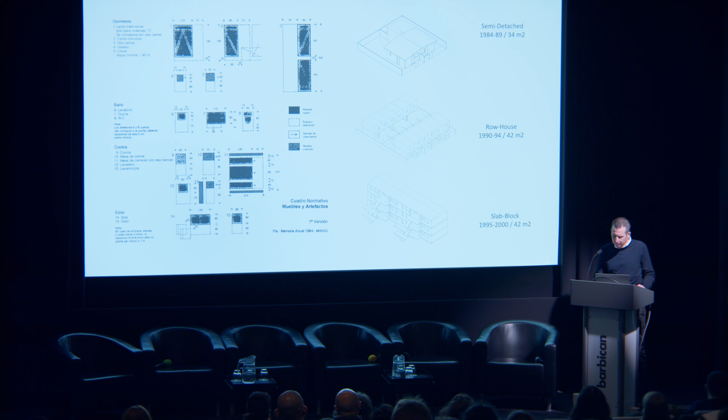Then the density started to increase, so they tried a row house typology where they could create an extra bedroom in the future, and finally a slab block typology that was actually the most proliferated one. This is a typical plan of the slab block, where you can see how this very basic furniture is fitted very tightly, without any possibility of putting it in a different way.

This kind of housing created two important problems. On the one hand, it created a massive problem of urban sprawl, creating huge neighborhoods of nothing but housing, and of course a very severe problem of segregation. On the other hand, the dwellings were really small, so people started to make use of the communal areas, appropriating public space and transforming the image of the main buildings.

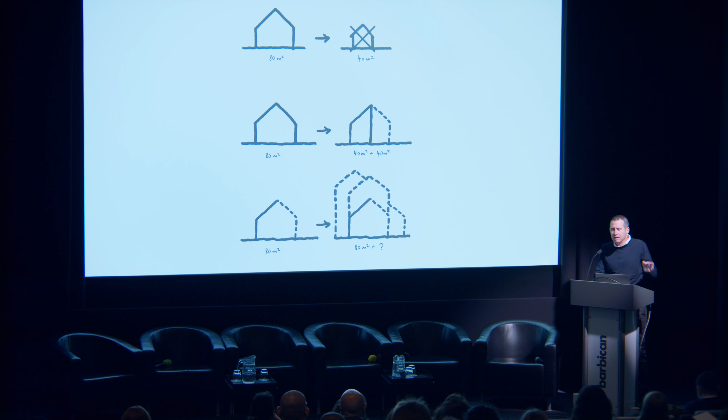This led to a second period, driven mainly at the beginning by Elemental, who advocated for creating much more generous dwellings, saying that a decent dwelling should be around 80 square meters, which was actually the DNA of the middle class. And also, to achieve that, incrementality should be considered within the standard.

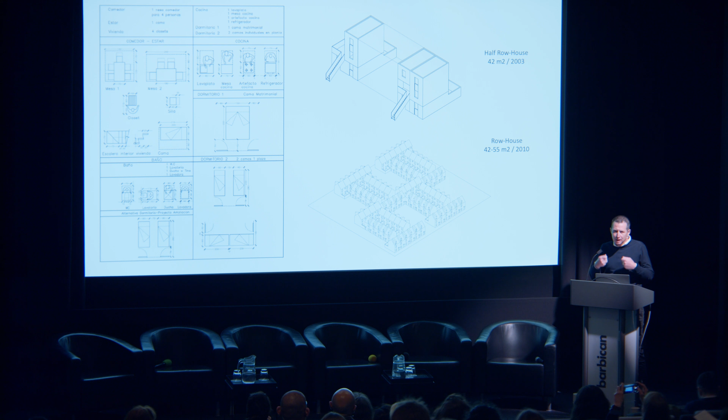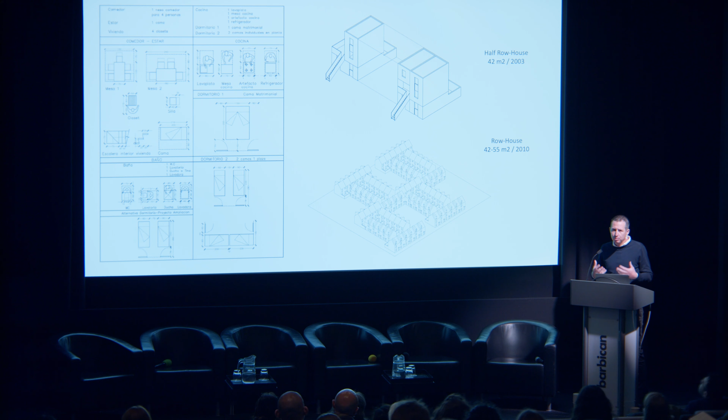So the state created this new set of standards that was not only a compendium of furniture, but, most importantly, contained the diagram of a final house—the diagram not only in terms of the image but also in the functioning of the house, how all the program comes together.

But as probably everyone knows, this just never worked. It was a good idea, but very little housing was built during that period, and the outcome was, I would say, kind of the same—as chaotic as the previous one that they were actually really criticizing.

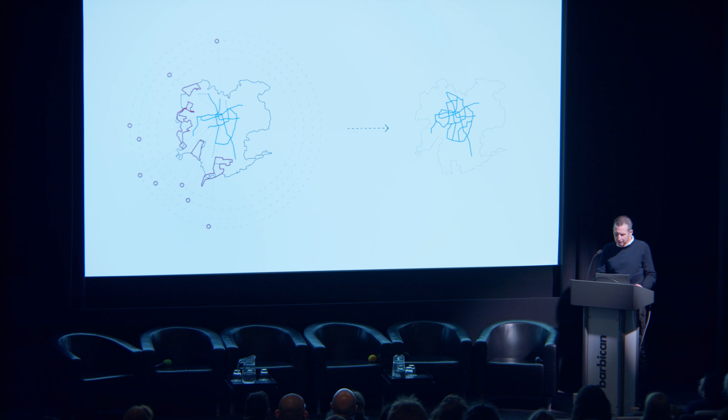So the state acknowledged this problem, and also that this kind of housing was only possible in the far periphery. They recognized the importance of doing housing in central areas of the city, and at the same time realized that the first subsidized housing built during the 80s and 90s started to collapse, and that the cost of refurbishing it was 7 times the money originally spent. So they understood they had to do things differently.

This opened the third and current period, as I would call it, which is about putting subsidized housing in central areas of the city, meaning also thinking about housing in terms of high density.

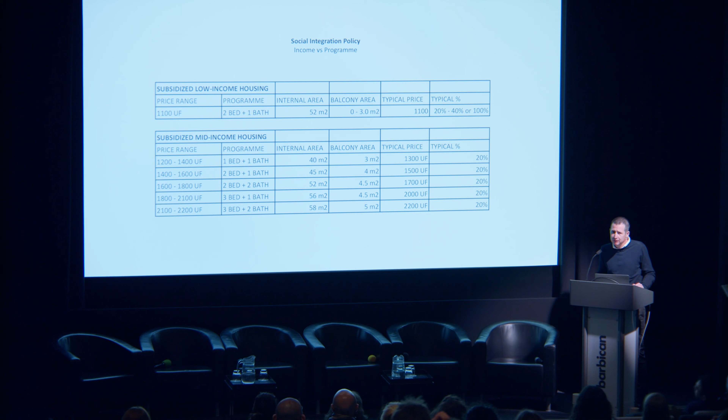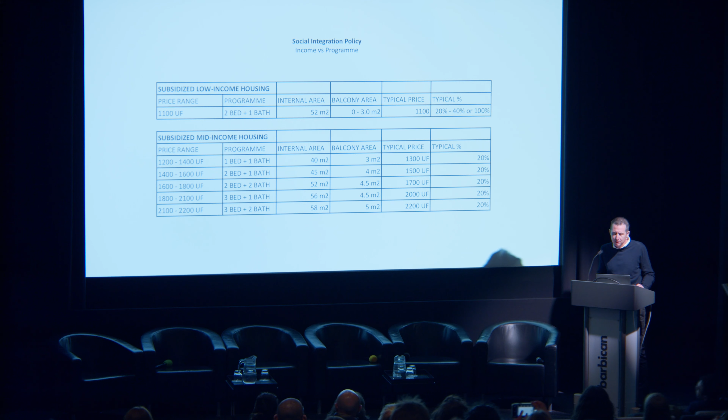The main tool to address housing provision is mainly through a social integration policy that addresses not only low-income housing, but also mid-income housing, which has been struggling for the last 10 to 15 years to access housing. This is really new. The state is not only subsidizing the most vulnerable people, but is starting to address a huge amount of people, a significant amount of the population.

This is very important to understand: the low income gets a kind of generic program. They always access a 2-bedroom, one bathroom flat of 52 square meters, and the mid-income get what they can pay. So they're not actually deciding much what kind of housing they access.

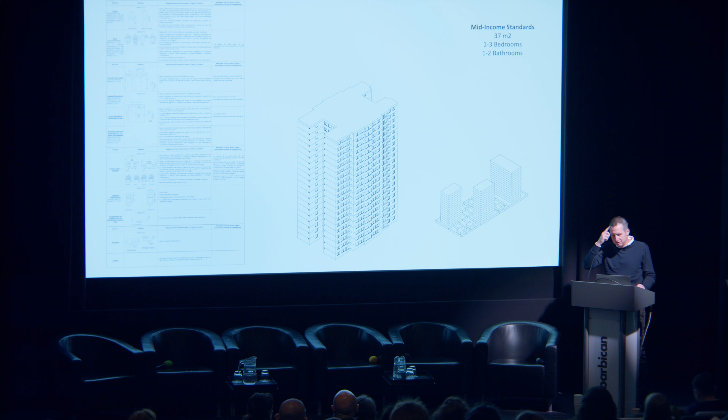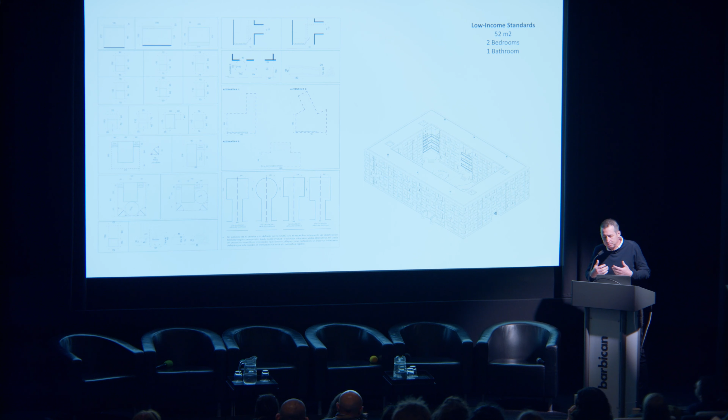To put both kinds of subsidies together, they created two different standards, one for the mid-income, in theory to be applied in high-rise, and another one for the low-income, meant to be applied in mid-rise because of maintenance problems, precisely because of the lifts. I will stop now.

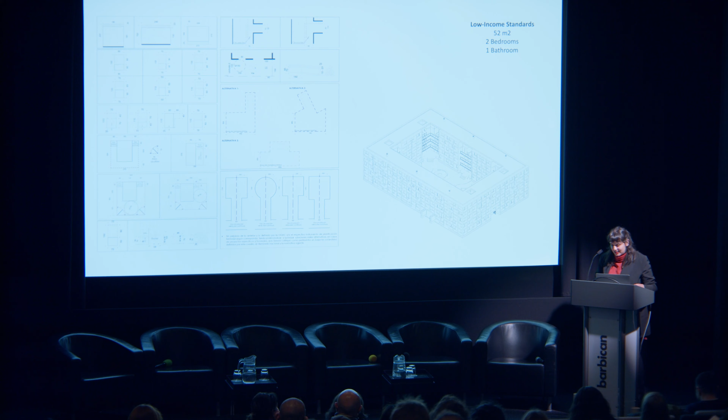Hi everyone, and thank you, Alvaro. As he said before, I'm going to talk to you about the experience of living in this kind of houses.

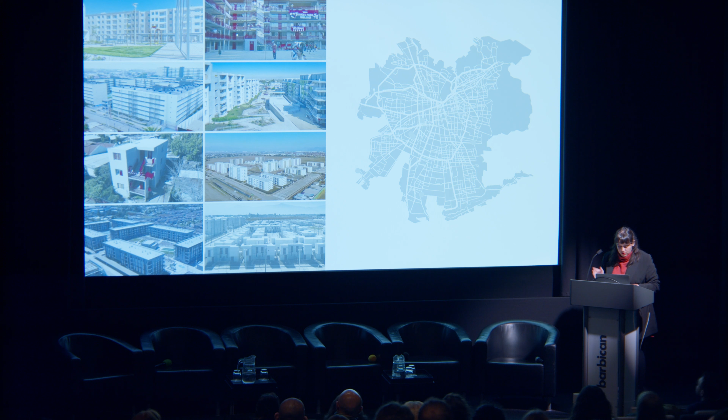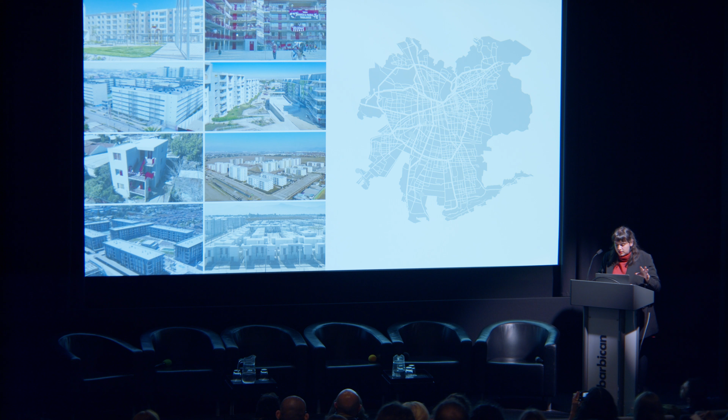So we went through 8 cases. I'm not going to go into detail about each one, but we can see that they are massive, and these 8 cases work as an example of what is being built in Chile at this moment. They were in different parts of the city.

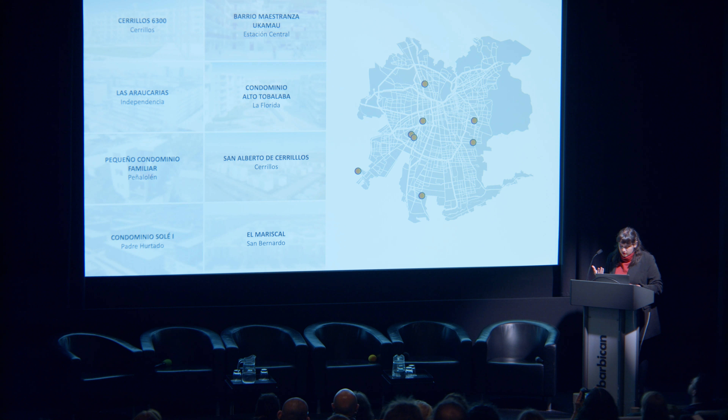So what we want to discuss is the inhabitants' perception of their own houses. These 8 cases were different types of households: couple and children, couple no children, lone parent, extended family. We asked them about several topics, but what I want to show here is that even with different household compositions, we have the same program.

We have dwellings with different numbers of rooms, but houses tend to be the same model. The logic is hierarchical: one main bedroom and one or two smaller bedrooms. Different households, of course, have different needs, but are fulfilled with the same program: 2 or 3 bedrooms and 1 or 2 bathrooms.

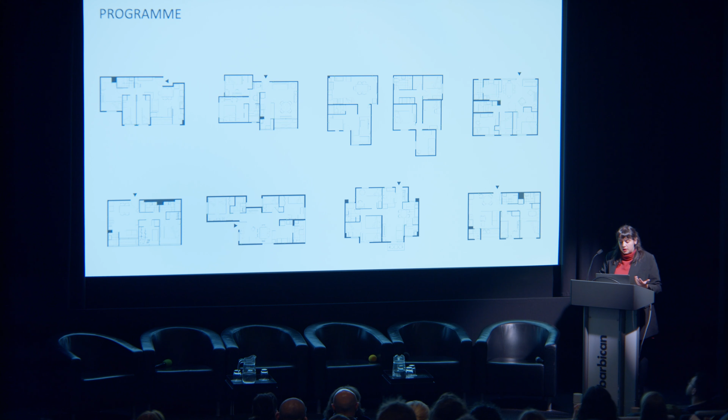So to talk about storage, people claim they don't have enough space to store things that are not clothes, especially. They don't have space, so they think they have to stack things upon each other, and they also end up using other spaces of the house to put things.

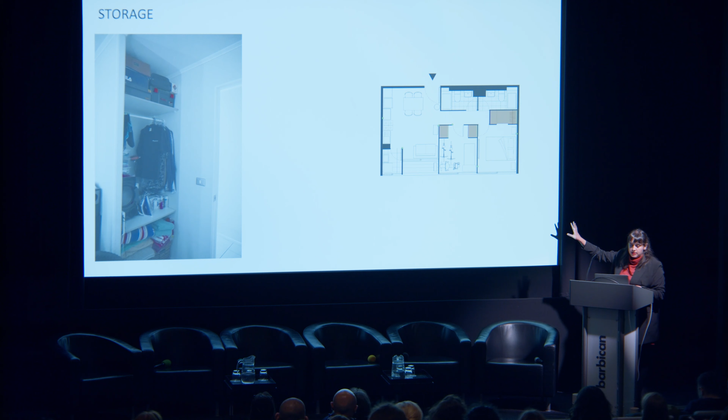For example, this is the kind of closet area that they have. This is another case. When we talk about storage, we are referring to the space to keep clothes, because this type of housing doesn't consider storage for other items like suitcases, seasonal clothing, or Christmas decorations. Those things are not in mind when we design this kind of housing models.

We can talk about two ways of seeing storage: not having the space, lack of space for keeping stuff, but also it's about using the correct furniture. Often people can't bring furniture they had before. This shows that standards not only apply to space, but also to the things we need to buy to put inside our houses.

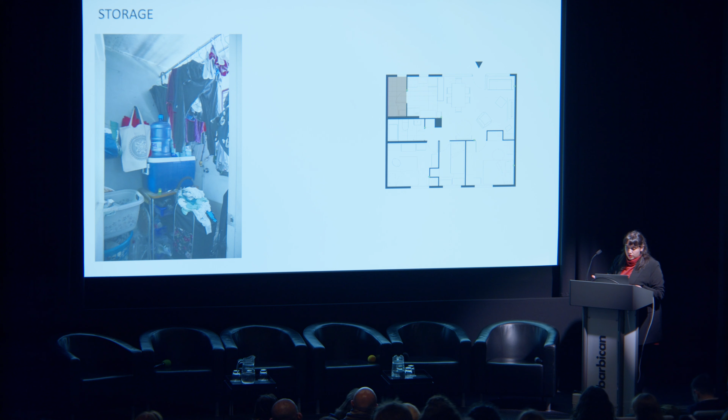For example, in this case, besides the closet area, this house has a lot of old furniture from their previous house, and it doesn't quite fit. There's also another area that ends up being like a storage space, which we call logia, or the laundry area. I think it's unique to the Chilean case—it's the space where you have your own laundry unit and sometimes your own dryer, but it's also a space where you put the gas water heating installations, because the law forbids having them inside an unventilated room or inside bathrooms.

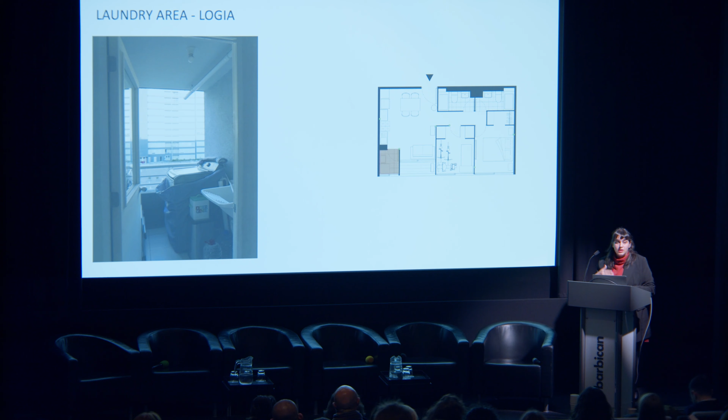So this is a space where people also have their cleaning supplies and storage, as I said before. Even though we have those spaces in Chile, people think rooms could be bigger because they had to stretch to get by. Although this space meets the standards, it's very limited and can only fit the appliance. It's not a place you could stay around.

About the kitchen, people have a preference for an open kitchen. It's something most housing projects propose, but even when they have a partition wall, people take that wall off to have open plan kitchens. A participant said she doesn't like to miss the conversations going around the house, or when she's cooking, she can hear her kids, so she prefers to be in the same space with them.

So this is the kind of kitchen that we see, and it's also in the same area as the living room and the dining area.

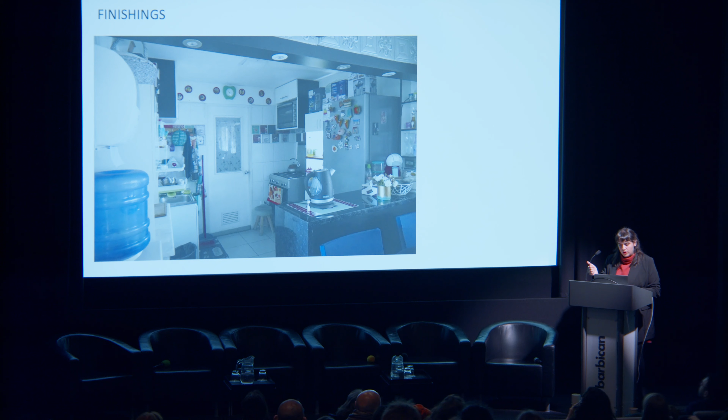This, I think, is really special to the Chilean case: some projects have not done the finishing of their houses, which is a strategic allocation of resources, because you can provide more area but you're minimizing spending on finishing. That implies the inhabitants are responsible for painting and flooring their own houses. Therefore, the houses end up looking very different from each other. I think it's relevant to consider that the level of finishing often depends on their own construction skills and how much they can spend on it.

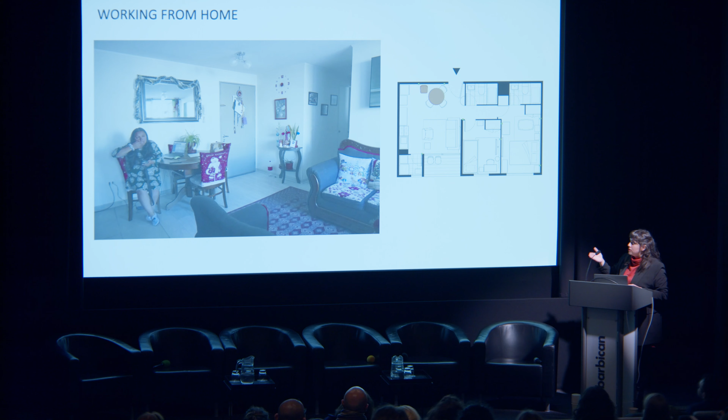This topic is pretty interesting because after the pandemic, we think working from home looks like this: working remotely, having a laptop, a chair, a table, and an electric outlet, like in this house. She claimed she doesn't have enough space because she's using the dining area. She doesn't have a room for it.

But working from home also looks like this. This participant had a pet grooming table, a foldable table she used in the living room, but she also had a hairdressing salon in the corridor of their house, looking up to their rooms.

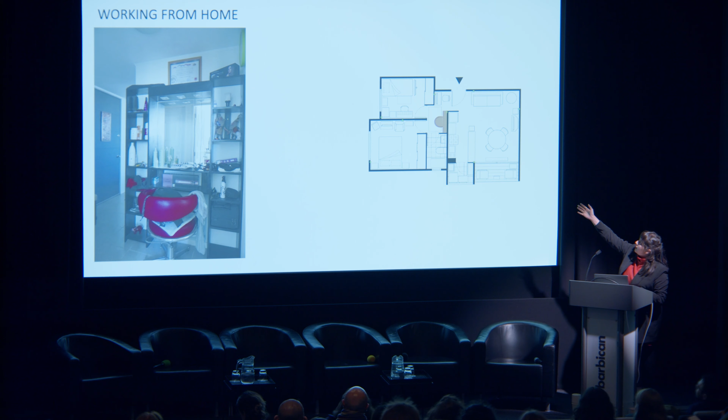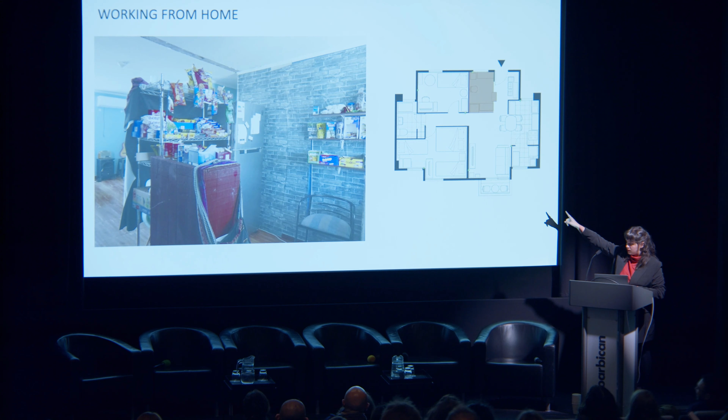Working from home also looks like this. This participant had a little shop inside her house, and as you can see, they had to take off the partition wall because that was a room. She sells goods inside the housing complex, and they took the partition wall off but used an existing window of the bedroom to run the shop without having to open the main door.

So I think it's very interesting to see how working from home means different things, and we must take into account that it's not only a laptop kind of work.

There's another thing that I think is really special for the Chilean case: how they think about safety. We asked them, what makes you feel safe? A participant said the quality of the building, meaning living in an anti-seismic building with good thermal and acoustic insulation, but also protections against external threats, that no one can enter your building, that kids can play in the enclosed area, having a concierge, cameras, intercom, knowing who's coming to your place before they knock on your door.

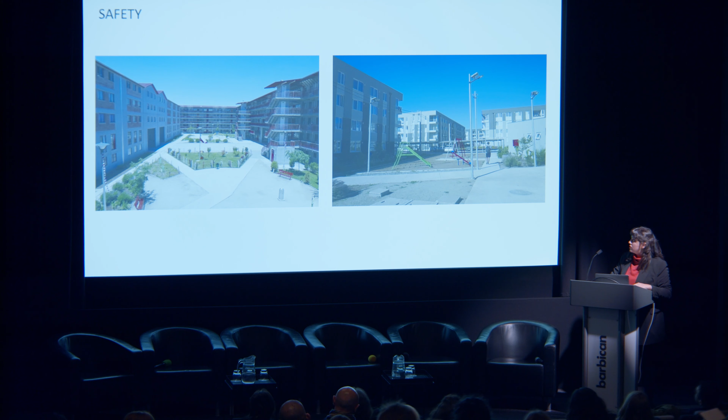For me, the most important thing about safety is that safety means ownership. It's part of the imaginary of the dream of home ownership, or as we call it, el sueño de la casa propia. It also explains the lack of regulation in terms of rental models, because people expect and desire to have their own houses, since renting is not only expensive but also carries the risk of being kicked out.

So now Alvaro can show us how practice answers these questions.

I just want to share very briefly some of my attempts to address some of the problems of housing standards in Santiago.

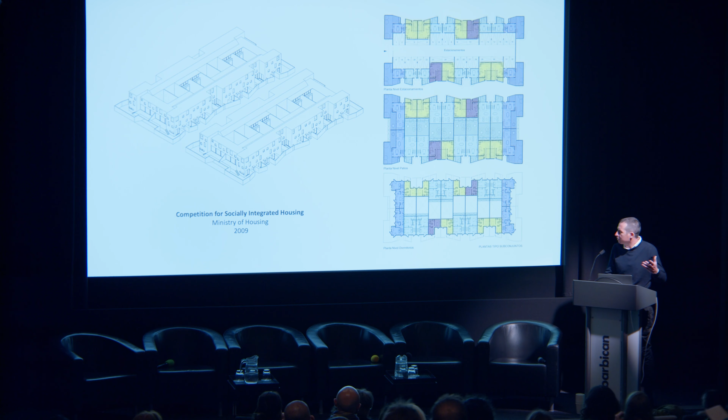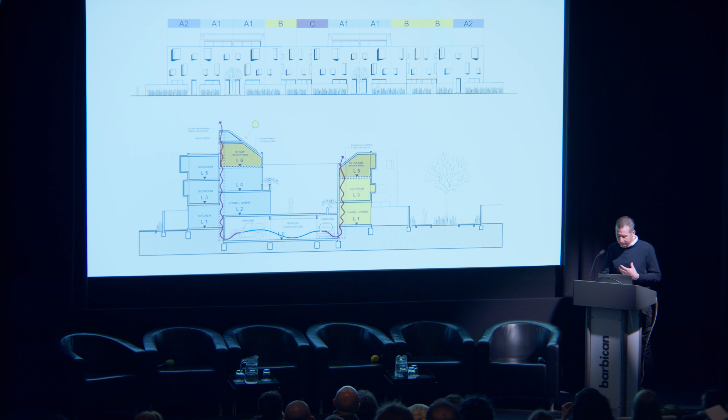Well, this is a project that is kind of very old. It was the first competition by the Ministry of Housing when they were just starting to think about the idea of social integration. So I did this kind of row house that could absorb the large amount of typologies that are typically considered when you design for the integrated schemes, mainly through a corridor and this section that talks about the complexity that happens inside, but in fact the facade is really neutral, producing a more homogeneous and more integrated architectural framework, let's say.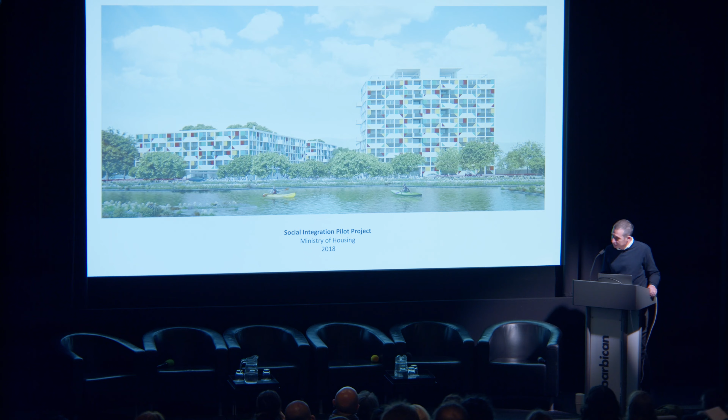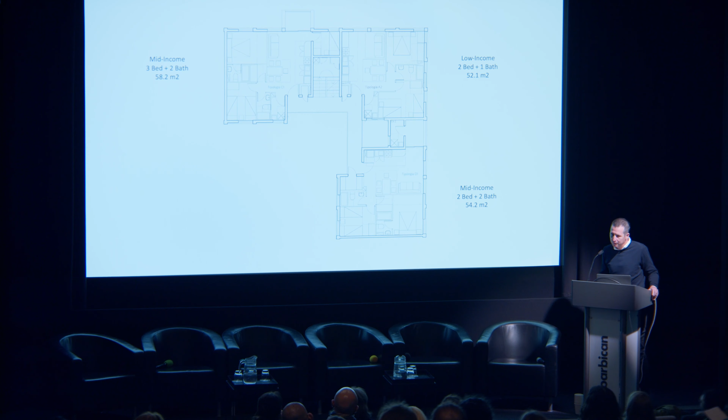Almost 10 years later, I participated in the first attempt of the Ministry of Housing to build their own housing scheme. They didn't build it at the end because of political problems, but it was kind of the same, now in mid-rise, and the same kind of approach: how to address, through one or a more articulated formal approach, putting all this diversity of dwelling types together, and how to create communities.

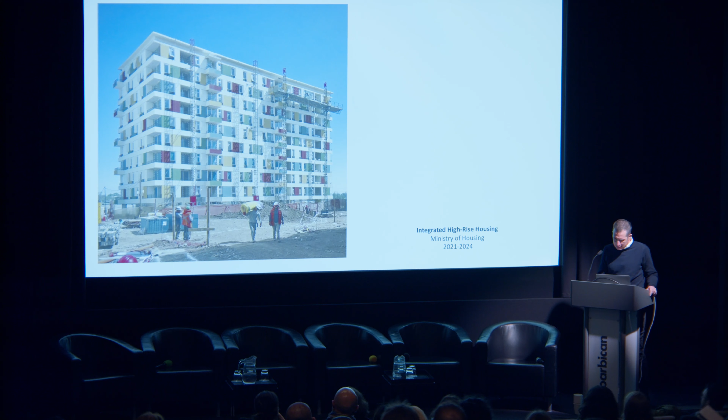And this is another project that I'm about to finish in June, and this is really talking about, I would say, the current state of what the ministry is aiming to achieve right now. In terms of they are not pushing much in terms of flats or dwelling design, but they are trying to include other kinds of standards in terms of design of public space.

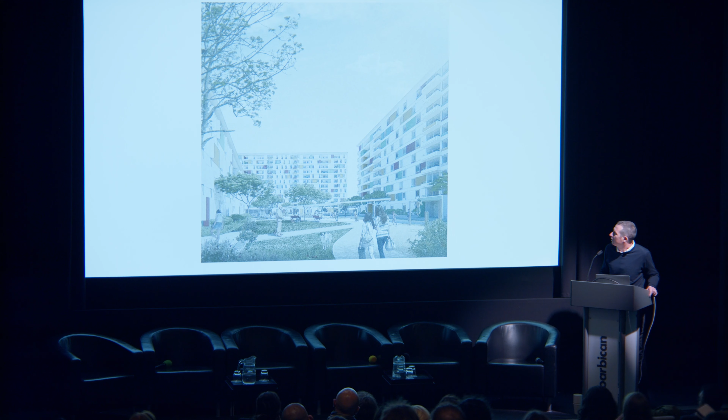How do you address the problem of parking? The project has 70% underground parking. For example, commercial areas, urban space, the entrance, the interior spaces, with specific areas for the different ages.

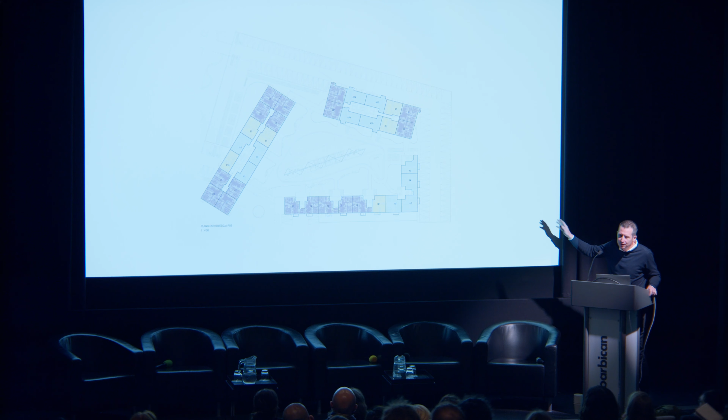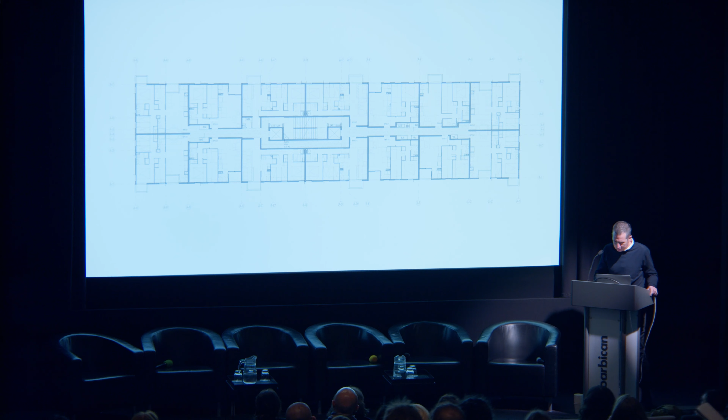Well, you can see how it's getting there. And also, as I was saying, this diversity, I mean, this actually looks kind of simple, but there are, I think, like 15 or 16 typologies, precisely because it's extremely over-specific, the application of standards, and that, I would say, overcomplicates the whole thing. Well, and how this neutrality kind of absorbs that problem.

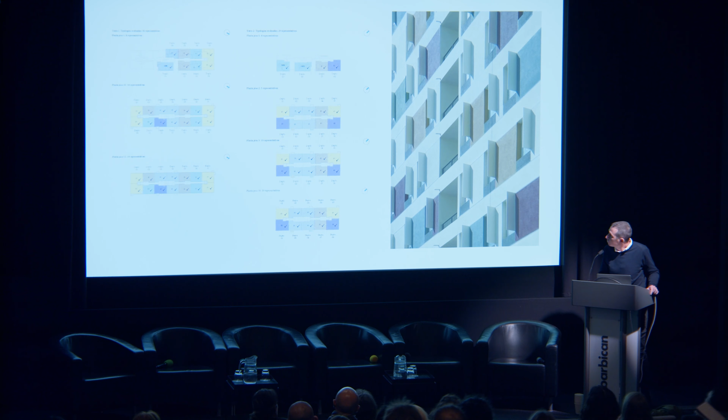Another aspect they're really trying to achieve from the ministry is energetic certification, and for example, all these vertical elements for solar control. They are really trying to have more versatile facades and the use of balconies.

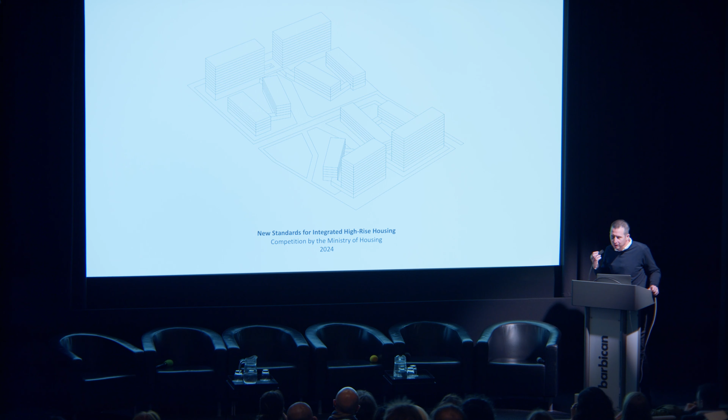And just to finish, I would like to share this competition that I stepped out of, but I think it's really important at the end of my practice, trying to break the approach to the design of dwelling units at the scale of the unit, and some very specific part of the Ministry of Housing.

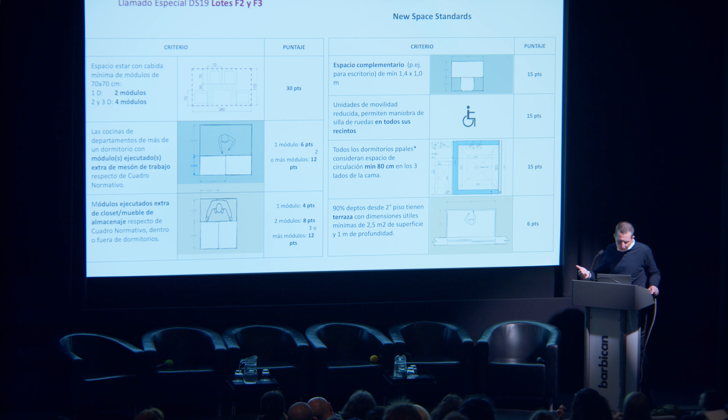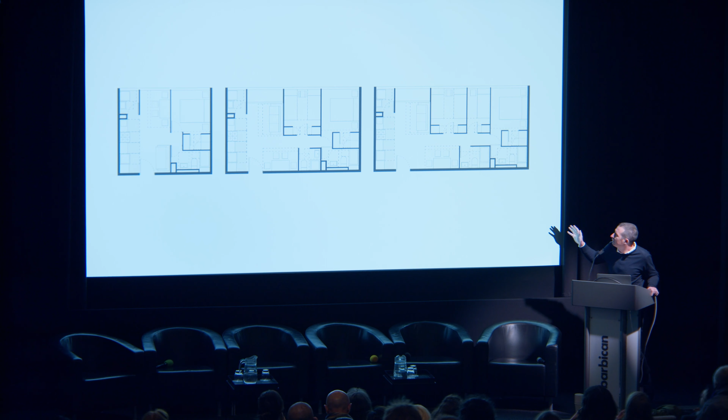They're trying to push for better standards. They're asking for larger space for the dining area, larger space for, I don't know, larger bedrooms, and so on. So instead of addressing the dwelling design in a differentiated manner, the relationship between, for example, this approach and the house is kind of the same.

So I thought, okay, but what if I try to do the opposite, how to try to create the most neutral and perhaps the most successful dwelling solution that you can find in the private market, which is what we call the butterfly plan.

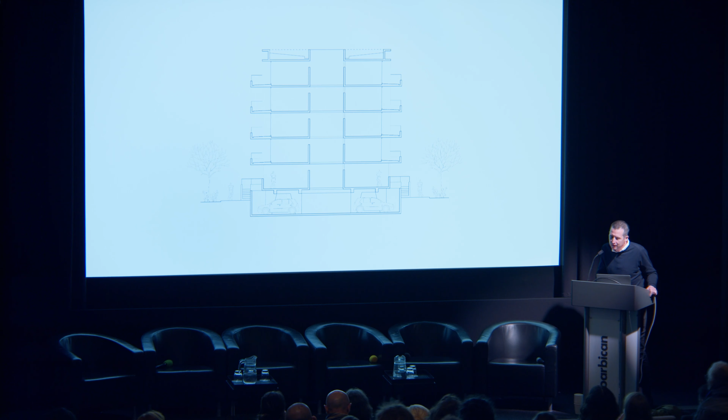So I developed this kind of slab block with the underground or half-sunken underground parking, which has very reduced costs, to half of it, and it's a significant part of the problem.

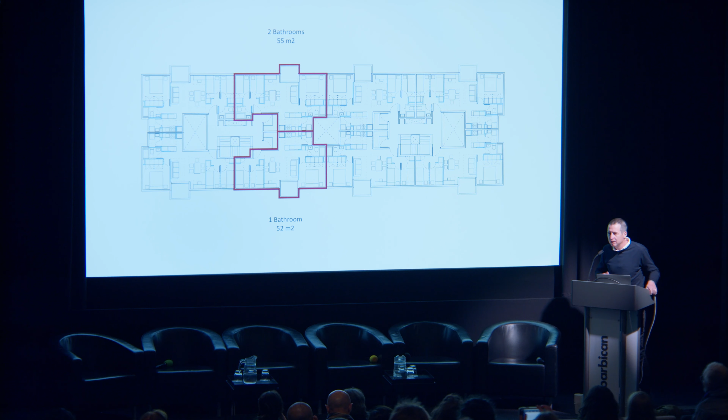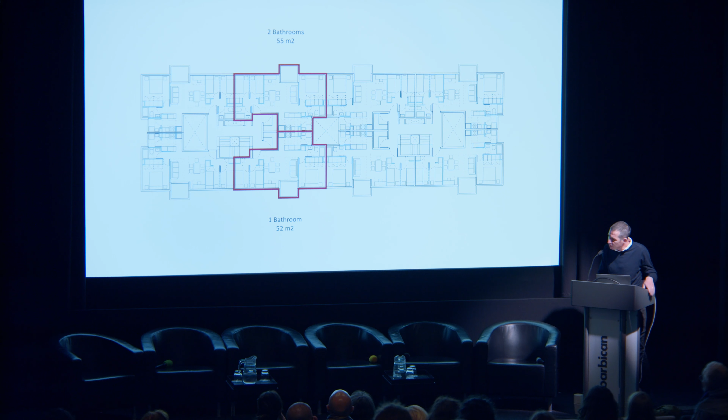But instead of having 6, 7 housing typologies, what if we have only 2? But how could these 2 address all the needs or typical needs? So instead of having dwellings from 45 to 60 or 58, what if the main difference is the number of bathrooms? And also to achieve this kind of neutrality that is given by the butterfly plan.

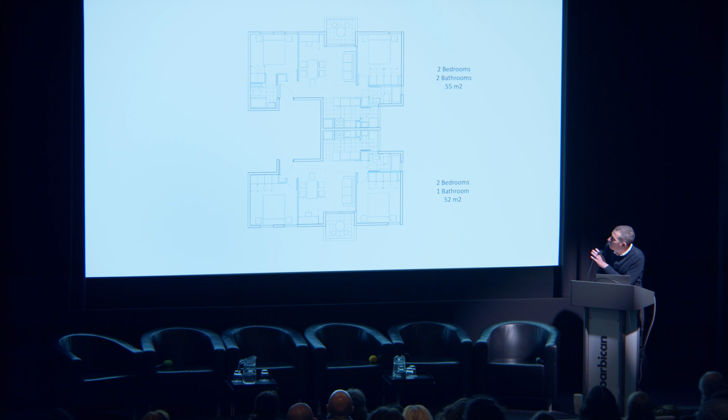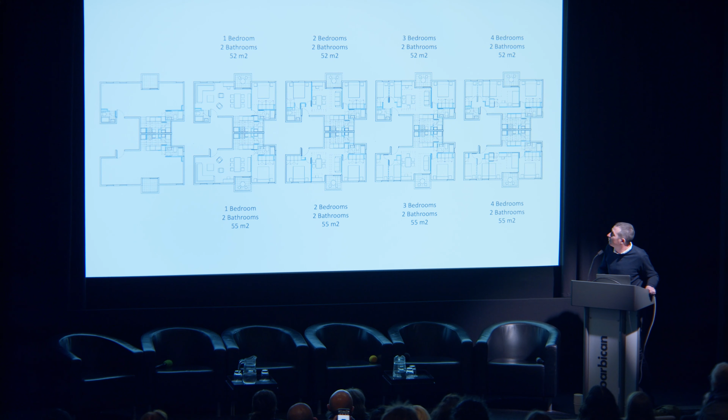But instead of only thinking about this solution as a static thing that could allow for an empty plan, one bedroom, 2 bedroom, 3 bedroom, 4 bedroom, it could actually allow for much more flexibility and versatility without necessarily increasing the size of the flat, which is really critical, because the bigger the flat, the lower the number of housing provisions. So I would leave it right here.